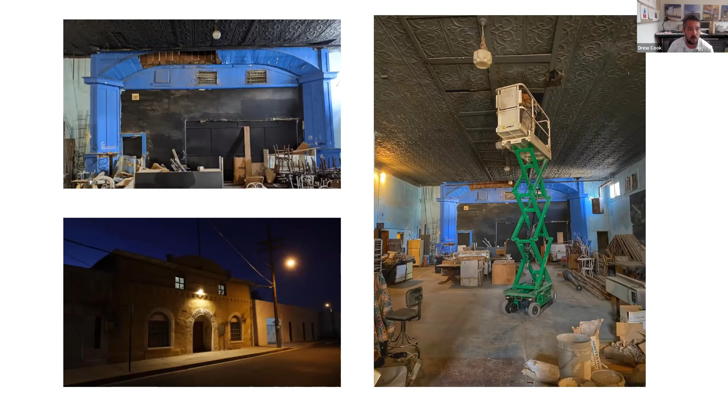Yes, okay perfect. All right, these are a few photos from inside the historic Teatro Carmen when it was originally purchased from the Rawlings family. As you can see, they used it as a storage facility for most of their construction materials and the various properties they own. You can see this is the original stage in the back, the blue, and the proscenium, which we intend to restore.

We started this project off by collecting as many images as possible to tell the story of what was going on along the street, because there is limited information from roughly 1960 to now. It was a real challenge to figure out what was going on.

Luckily, we were able to find the original photo, as you can see in the bottom left. We found that at the Arizona Historical Society, and we're guessing it's a 1918 photo of the original Teatro, where the Elks did not exist yet, built in between two existing buildings, borrowing the adobe walls on both sides. We then used a series of Sanborn maps to lay out what had happened and how the street was built, and the street facade.

You can't see it here, but they had the two theaters along Meyer confused. They originally labeled the Carmen as the Royale and the Royale as the Carmen, which later was adjusted.

Here's a 1924 photo, the third photo on the top line, that shows the theater with the original fly loft, and you can see the shadow bearing down. So we knew that it had a fly loft and a large stage, which was taken away quickly.

A 1941 photo shows that the fly loft has been taken away, but you can see the backside, the oblique here of the corner market, which was the Lee Market, and the fruit stands and markets in between. Some of the Sanborn maps identify that there might have been a bread oven back here. We're not really too clear.

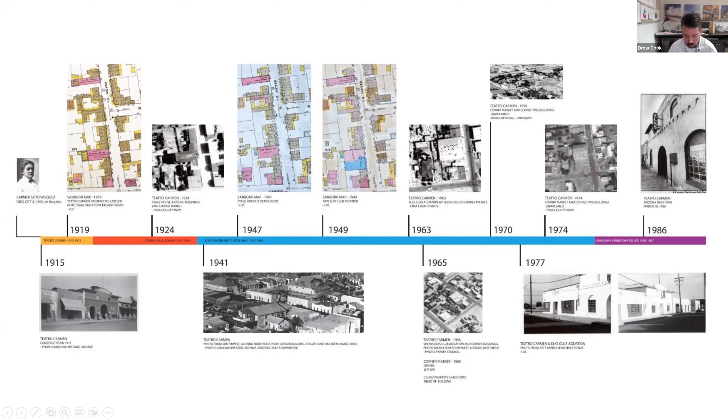These two bottom photos, 1977 photos, are from the historic archive - I'm forgetting the word here - but these are the only two photos we have of the Teatro and the Elks Club aside from our 1915 or 1918 photo.

Here are some of the Sanborn maps that we use to align with our street facade and tell the story of what was going on. You can see through the different maps, in 1947 the Elks had appeared. We found some newspaper articles that identify that the Elks took over the building in 1935, but it's still unclear. You see in the 1949 photo or map that the Elks had added on their adjacent building and identified it as the whole two buildings of them.

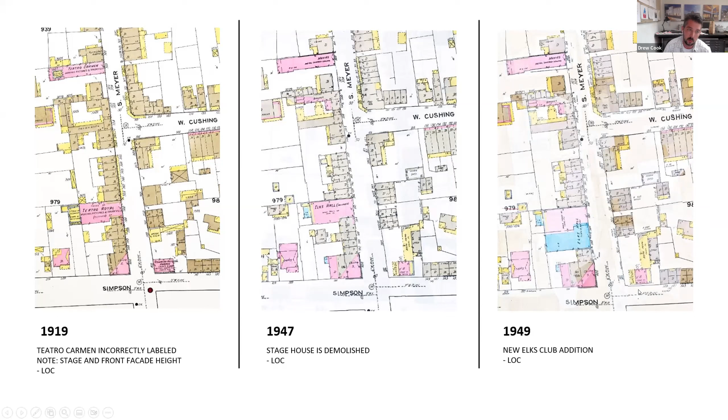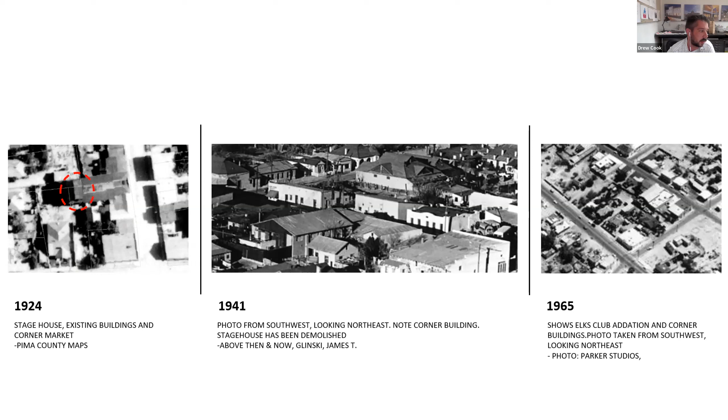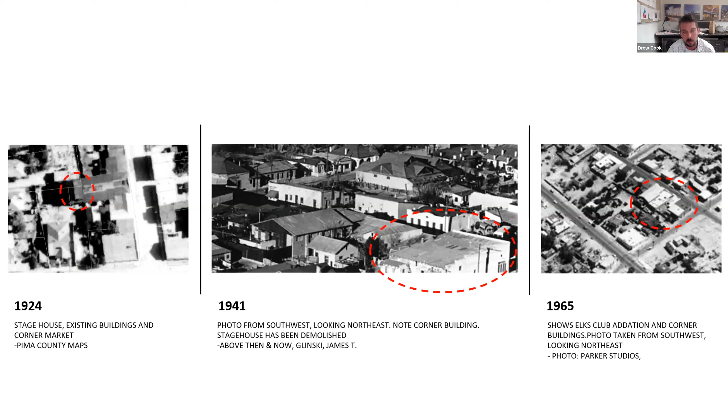Here's a series of aerial photos that helps us tell the story, which I have already gone over, but here's the stage house, as you can see, appearing in 1924. Here is the old market at the corner of Meyer and Simpson in our 1941 oblique. And then here it's still existing, but the Elks Lodge is built in, we guess, 1947, 65 in that existing photo.

Here we have some of the original facade photos, and this is our 1918 photo that we found at the Arizona Historical Society. As you can see, the building was originally a brick building with large openings for the front porch, so you could actually enter in, and it was a covered patio, which is our ideal goal to return the building.

Here's our 1977 photos taken from the historic maps, and it shows that the Elks inhabited both buildings. There's a blade sign with the Elks on the front. You can see that the exposed brick was still there, which is something we intend to return.

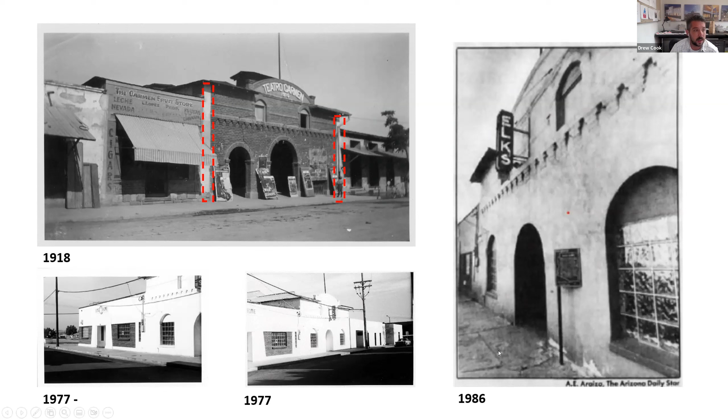Then here's a 1986 photo from the Arizona Daily Star. This outlines the two borrowed walls. Now, the wall that is on the south side is still existing - it's a high adobe wall, goes about 20 feet high. But the one on the north side has since failed and was replaced in two series of construction with CMU block, and you can see that in our most recent photo of it.

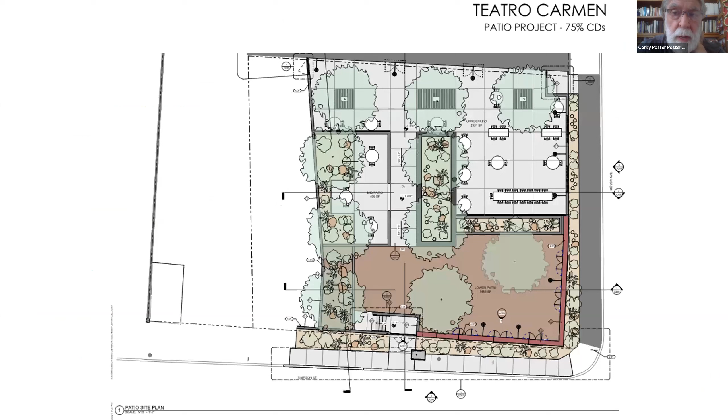We've got a 75% set of drawings that show that. This shows very clearly the upper patio and the lower patio, with the upper being urban, opening directly from the original Black Elks Club building. The area on the left will be part of the last phase of the project, so it's shown in white. Interestingly, that historically has never been built on and is currently a driveway as well.

So an upper patio with trees and tree grates, a ramp down the middle. There's a stone planter dead center in the site that we're going to be using the excavated stone from the basement of Lee's Grocery, which is in the southeast corner of the site. Entry on both Simpson and on Meyer.

Principally the restaurant patio entry will be on Meyer, and the more public patio will be on Simpson. Pima County and Stratford Artworks had this really good idea that we should open the patio much sooner and get people used to using this wonderful space even before we have the rehabilitation of the Elks Club and the Teatro Carmen.

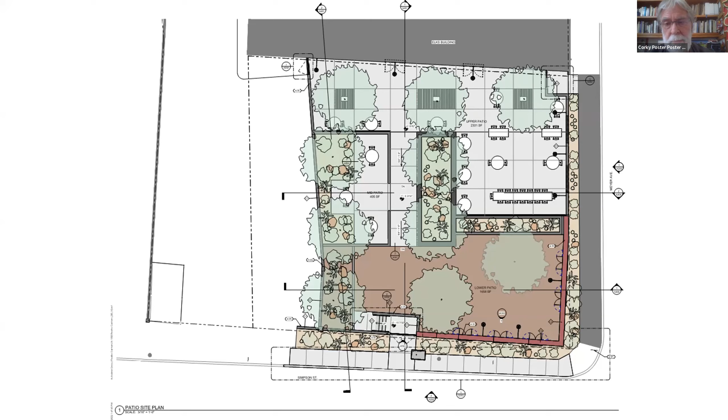This is an older rendering of the patio site. It's accurate in the patio itself. It's not accurate on the walls in the southeast corner and the south edge, and I'll get to that in a minute. On really good advice from the Tucson Preservation Foundation and others, we've raised those walls to mimic the Lee Market that was on the corner, but we'll get to that in some detail.

This gives you the sense of the way the planters divide the site, stepping down from the finished floor level of the restaurant and then ultimately down to Simpson. There are three steps that go down from the lower patio down to Simpson. So most of the patio space is raised. Next.

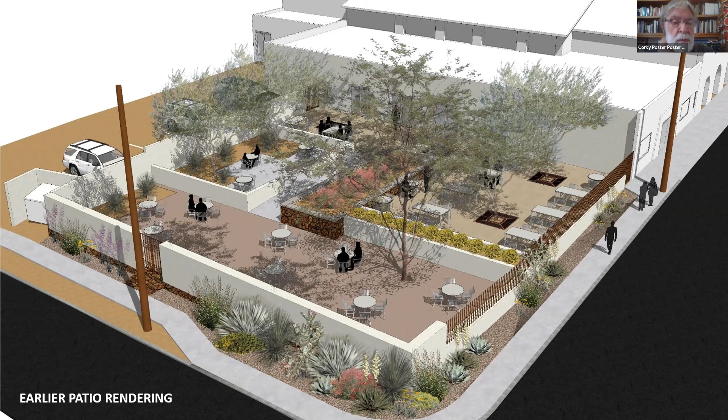This shows a revised image of that patio. You can see that while we kept the lower, more accessible elevation in the middle of Meyer, as you go south to Simpson, we've recreated the mass and volume of that corner grocery store, but only as a patio wall with shuttered openings that connect from the outside to the inside. You'll see a little bit more about that in a minute.

So this is the Meyer Avenue elevation, the full elevation on the east side, showing the restored brick Teatro Carmen, the restored Elks Club elevation that we have excellent original drawings of the doors and windows.

And then the new construction of the patio, which is enlarged above, showing some see-through gratings as you walk south, and safe security protected openings with shutters that open in.

We're going to use some of the stone to create a stone base on the south side, that is the left side of this drawing, and around the corner.

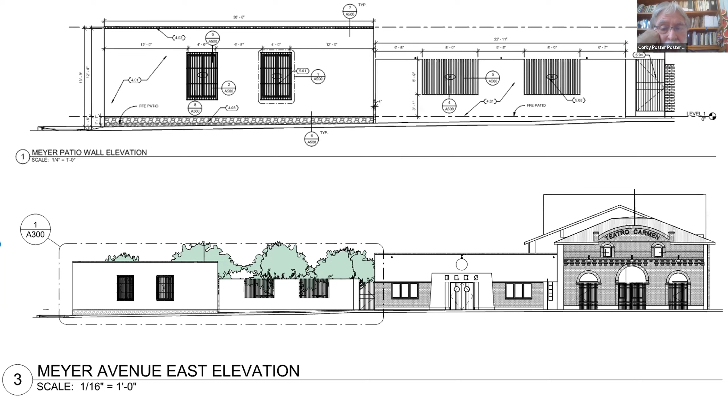This is now around the corner. You can see in that inset photograph from the oblique aerial that Drew showed earlier that it had a step down along that south elevation, which we are mimicking as well.

We had a really good suggestion from Philip Naher at our Barrio Viejo meeting, where he thought, and I agree, that the third window marked with a red X above should also have a red X below. We're going to remove that because, as he pointed out, there's not enough room from the top of that lintel to the roof to have actually had a roof structure, so we think that's a good addition and suggestion.

So this shows the detail of that. Again, those are security protected shutters that open up to the inside, so the restaurateur or the controller of the patio will have the option of opening or closing those.

And then as we go further south, just off to the left of this will be our trash collection and entry into the parking area. Not yet elevated, not yet drawn. That will be a later phase, and we will bring that back to you.

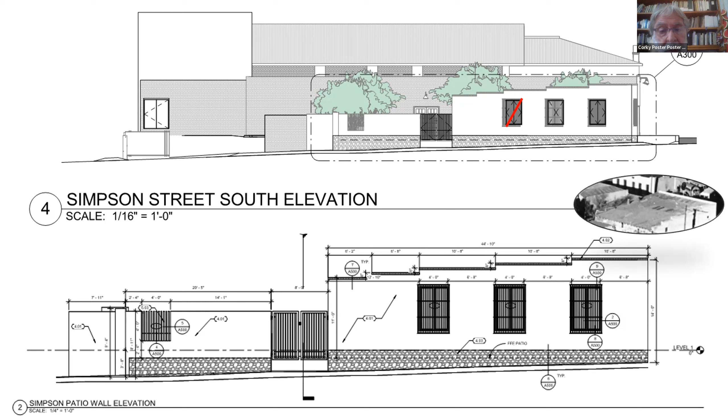Here are some sections. This is on the top, we've got an east-west section looking back toward the Elks Club, showing the new door openings back into the restaurant, low walls and planters in the middle, and giving an idea of the height of that patio wall on the right side of that drawing.

And then this is looking back to the south. Again, the planters in the middle, the patio wall, the lower patio wall to the left, and then the taller wall and the step down of that south wall.

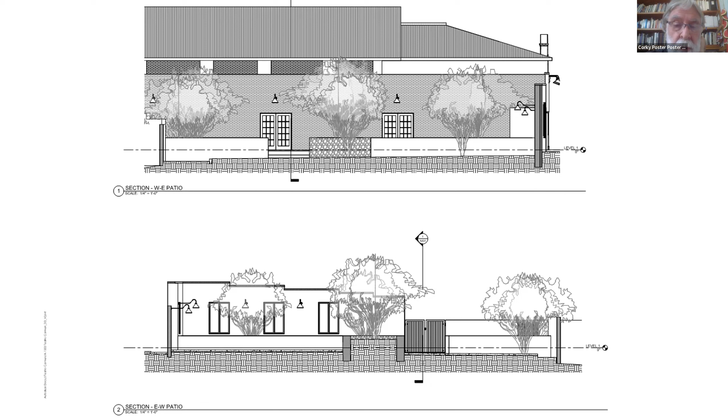Again, following Philip's suggestion, that third shuttered window on the right will be removed. And those gates then will go out to Simpson.

This is one more section looking east on the top. So it's a north-south cut looking back toward Meyer, showing the height of the patio wall, showing the step down foreshortened in the wall along the south edge, and showing that stone planter that will be in the middle of the patio.

We're using lights that were actually shown on the original Elks Club, and it's consistent with a lot of the more recent lighting in Barrio Viejo. Those are all dark sky compliant.

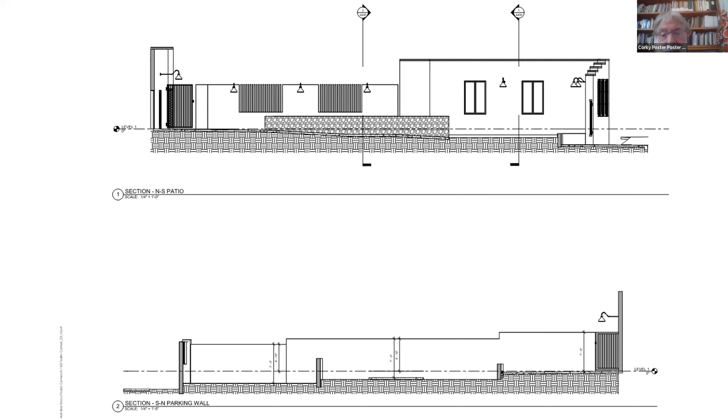And then finally, a last image looking west, and behind that white wall, screened from the patio, would be the employee parking lot. Again, showing interior and exterior lights.

These show the openings. We've got some tricky security issues with panic hardware required to get out of the patio, and therefore some tricky ways that we have to protect the ability to kind of reach around and open the panic hardware from the outside.

So we have the shutters shown on the left, top and bottom. We've got the doors, which will, this is generic. The heights of those doors will be at various heights, and those heights are shown on the right side.

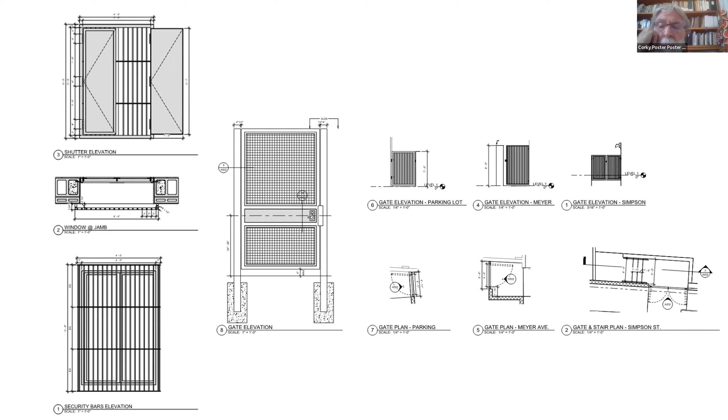Bottom right shows the entry from Simpson. We'll have the gates right at the wall so that we don't have folks sleeping in that alcove, but it'll show a few steps that get you up to the lower patio, which is then higher than the street.

Okay, let's go back. Drew, can we go back to that first axon that we have of the patio, while we have the conversation? I think that shows the most information.

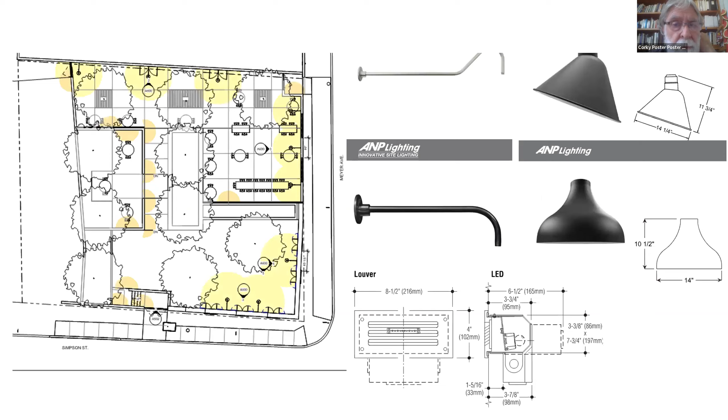Yeah, let's just hold that. And we're happy to hear any comments from the Plans Review Subcommittee.

Thank you very much. Does anybody have comments? Just had a question, you maybe will address this later. Is the archaeology going to be done with the Lee's Market area? Is that where you're doing archaeological work?

I'm going to let Scott, if you're willing to answer that question. Scott is an archaeologist, and I'm about to screw up some of the terminology, and he won't. Are you there, Scott?

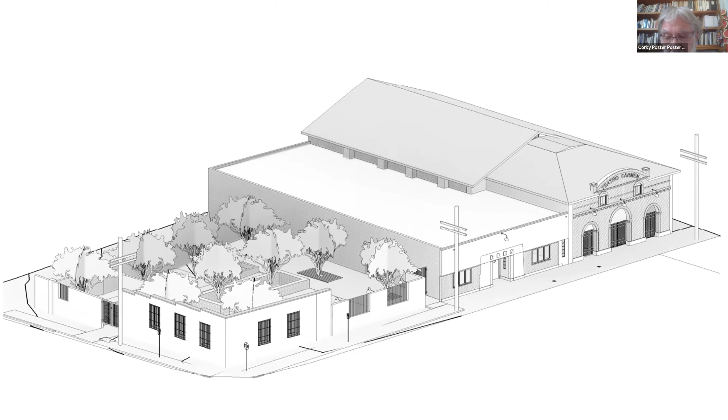I'm here. Sorry, I had to jump on a call. Scott, are you there? Oh, go ahead. I am now.

The patio has been tested archaeologically based on an early version of the footing plans, where ground disturbance was going to take place. The basement of the Chinese grocery was the most significant discovery—stone walls going down at least 5 or 6 feet with a dirt floor. It was filled in probably when it was demolished in the 60s, maybe 70s. We have a sample of the fill from the basement, and there are artifacts from the 60s that came out of it.

We don't plan to completely mitigate or excavate the entire basement. We'll only monitor the excavation for the footings as they go in. There are some other features on the west side of the patio area, where the footer of the west wall will go—pits with a lot of artifacts, probably associated with some of the businesses that were along Meyer Avenue.

Those have been excavated to the degree they could be in testing. The whole area will also be monitored as ground disturbance for footings and so on takes place. The Chinese grocery on the corner really is just the basement filled with demolition and other debris. We haven't found any features outside of that yet, but that will be the source of the stone that Corky was talking about for the connector in the patio.

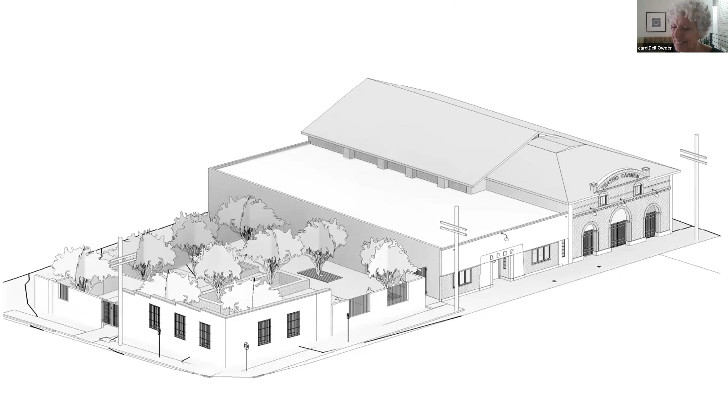We will discuss that in the next phase. We've got a lot to talk about with that. Okay, I'll shut up and let you move on. Thank you—that's in the second half, the second agenda item.

Ricky or Joel, do you have any comments or questions? Yes, this is Joel.

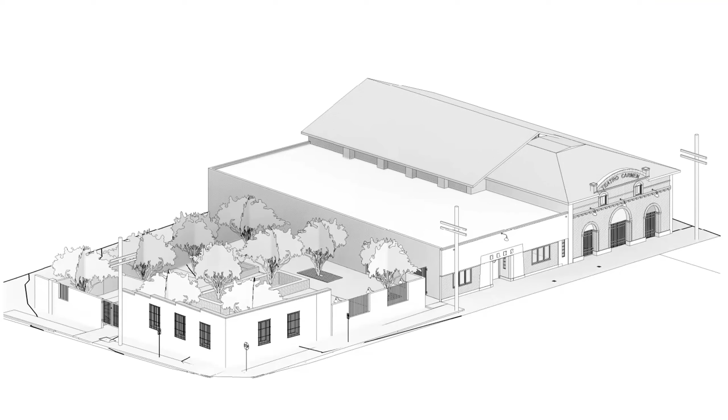I noted in one of the first photographs you showed, there was a restroom core highlighted—what was it, blue? Drew, can you go back to that? Keep going. Oh yeah, teal, more teal I think.

Can I ask how that relates to the original placement of restrooms? Did we have restrooms, or was it an outhouse situation, or what?

So only the pink, orange, and tan were the original teatro. The Elks Club was built with bathrooms, kitchens, bar, and everything else. One challenge—and I'll mention a comment again from Philip Nair—is that we needed to provide bathrooms for both men and women serving both the teatro and the restaurant. We needed a location adjacent to the teatro lobby that could also be used by the bar and restaurant. So while putting it along the front facade wasn't our first choice, functionally it's the only thing that works.

Philip Nair made a really good suggestion that there be frosted windows along Meyer Avenue, so you get light through for the bathrooms, but no vision into the space. He also suggested ensuring the Kelvin color of the LED lighting in there is warm, something at 2700 or 3000 Kelvin, so it doesn't look like fluorescent lights coming out of a bathroom projecting onto the front elevation.

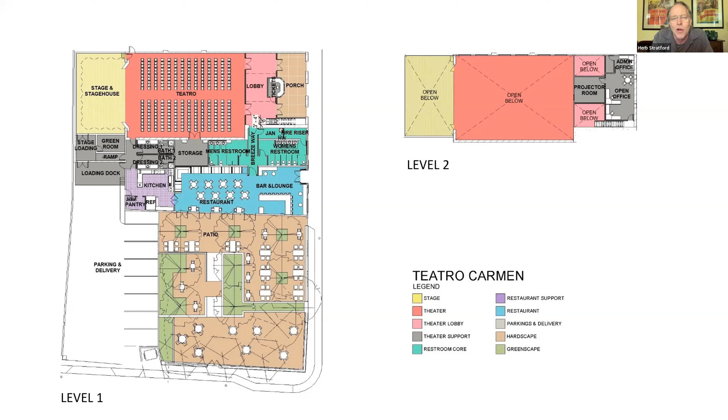I think there's a lot of unknowns at this point, but I definitely hear that, and we want to be a good neighbor. So we want to make sure that we have the space contributing. Right now it's a dirt lot surrounded by a corrugated metal fence.

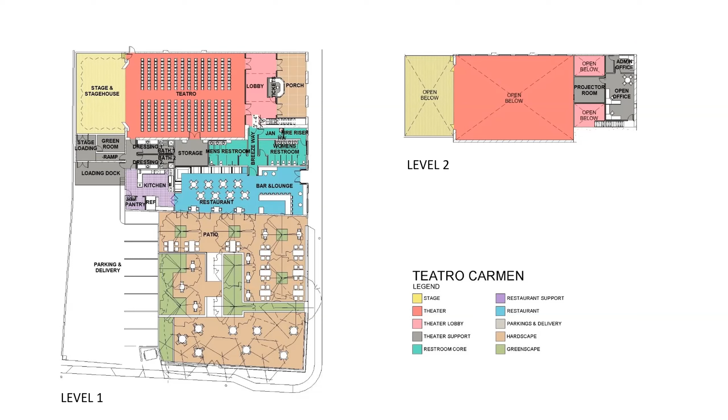So we certainly are trying to do everything we can to improve the streetscape and the accessibility. I really like what you did with that corner at Simpson and Meyer, and the suggestion you followed to mimic the building. I think that's just a really nice effect. Thank you. I don't think I have anything else. If you guys have anything else to add, or we can move on to the facade.

So we're going to talk a little bit about the facade project, which chronologically is the next project we're doing. The county, once we have the drawings done, which will be soon, will provide those drawings to their on-call historic general contractors, job order contracts. That work will commence within the next month and won't take all that long to do. So that will be a kind of a finished product. I know the county and Herb have been very anxious to show some real progress to folks on the street, and so the facade will go a long way to doing that next.

So we've got some pretty amazing photographs. If you look at the historic facade, 1915, 1918, the posters out there talk about the war, World War I. So we know it's pretty much within that era. The middle one is exactly how it is right now. And then on the bottom, you'll see obviously much more detail about this, is what we intend to develop.

We'll talk about the facade and the mural in some detail in a bit. Also, you can see that the facade is peeling, so we have a good chance to see what the quality of the brick is underneath there. As you might guess, there's some water damage to the first 2 feet. There are 2 layers of stucco. The outer layer comes off with your fingers. The original stucco has a pretty good adherence to the brick, so it's going to take some hand scraping. The photograph on the bottom right is the intersection of the brick wall with the adobe wall at that very southeast corner of the teatro.

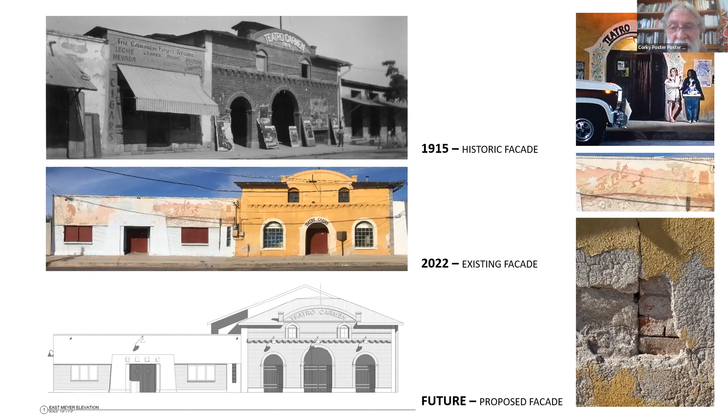So with that great photograph and the construction drawings that we have from the Black Elks Club by Blanton and Cole, the architects of that, we intend to restore that brick facade, restoring the openings of the 3 arches to allow a covered porch inside. The corbelling will be restored, and some pretty modest lighting will restore all of that.

You can see on the Elks that we had a really cool, what I would call Art Deco handmade doors, and we have the ability to recreate those doors. The brick will restore back to a natural brick, and the stucco will be refinished and repainted, and the mural will disappear - I'll explain why we're comfortable doing that. You can also see on this elevation we'll do a little plaster cap on that adobe wall, the tall wall on the left of the Teatro Carmen, and then the concrete block wall on the right side, which has replaced the adobe wall that collapsed sometime in the 70s.

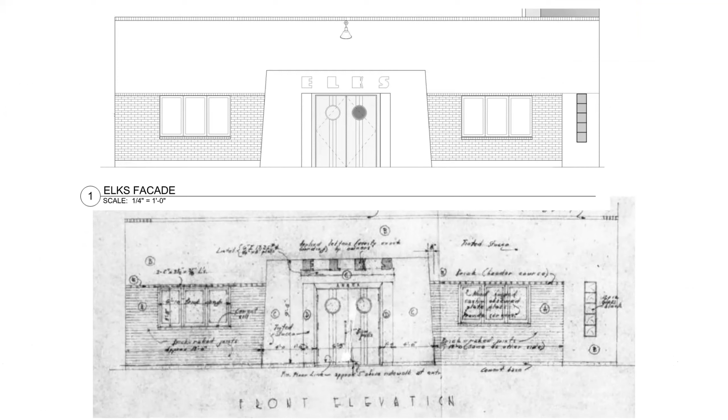Let's look now at the drawings. Nothing makes architects happier than finding historic drawings that allow us to redo this with some integrity and some real accurate information. We're not yet sure how we feel about the chubby letters over the door that say Elks, but we'll see what happens with that. You can see that we will restore that facade to exactly the way it was when it was drawn in the late 40s.

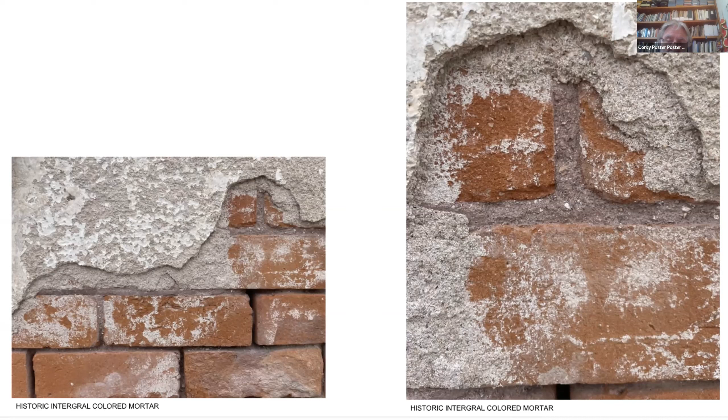And we're real comfortable with our ability to restore that brick facade, and look forward to doing it. As I say, that'll be the next project out of the chute. Drew, can you go back to the hand-drawn elevation? One more.

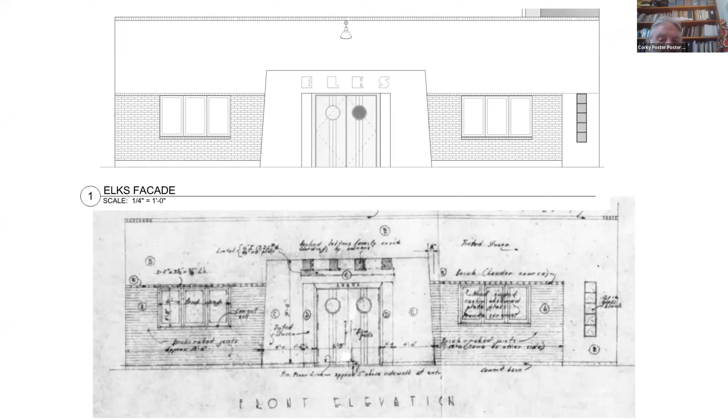Yeah, that one. Okay, any comments or questions? Oh, I have a question.

So, that original drawing from the Elks Club side that showed the chubby letters for the Elks, do you have any pictures of that? Because the other pictures that you had shown— No, we do not have that. We don't even know if they did it. We know it's in the drawings, but it could well be they didn't like it and never put it up. But we have no images that show that sign.

And does the door have a window in it, those circles? Yes. Okay.

And I'm gonna come back to my other question. Somebody else can go first.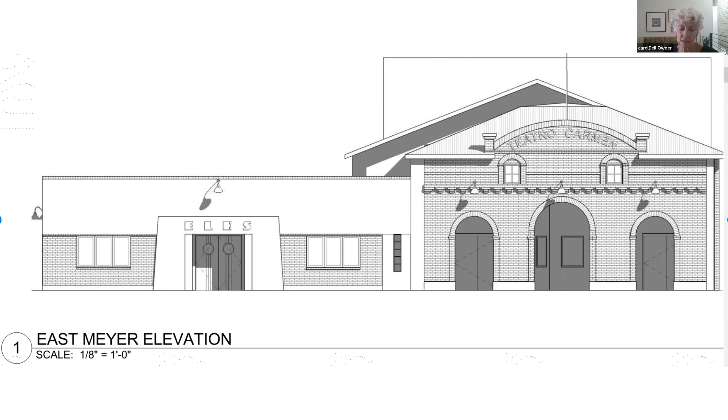Anyone else? Joel, Carol? I just wanted to say what a wonderful job you've done. You've put a lot of thought and effort into this, and I just think it's really great. I was going to ask about signage as well, but you've sort of addressed that, so that matters a lot. Thank you.

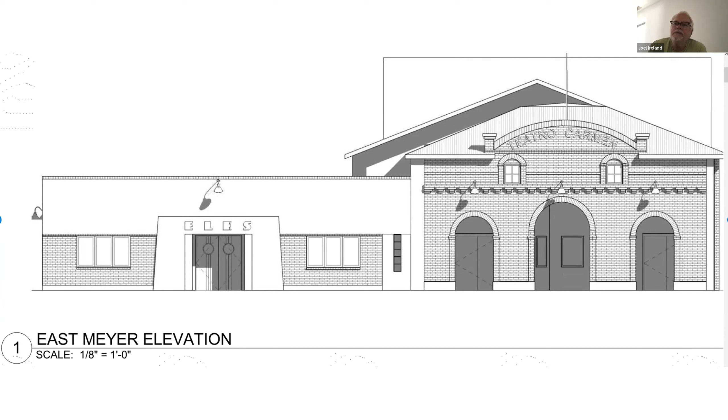This is Joel. I've got a couple of questions if you don't mind. I'm sorry. Just one second, I'm sorry.

Corky, could you? I was wondering about the bar gates that you showed us there. If you can go back to that section.

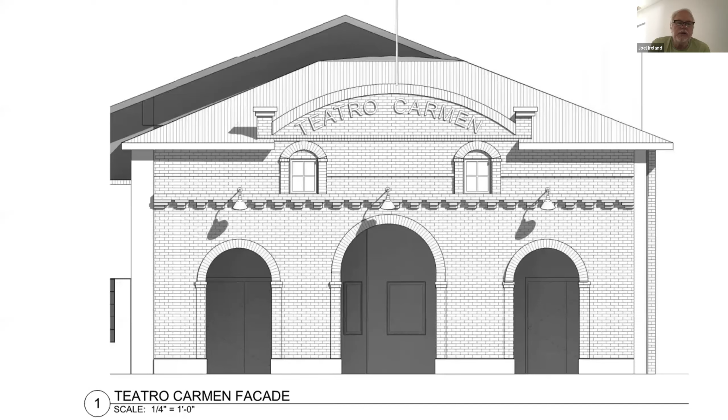Did you hear me? Are you there? Yeah, is that what you mean? I'm sorry, I'm trying to get my picture up. I had my phone ring through my computer. Just one second. Yeah. Yes, that's the picture I meant.

Okay, we know we have concrete bases to the arches, and we also know we have a little kind of pilaster capital at the top. But that's the only image and the only knowledge we have of those gates, and we're feeling like that certainly tells us there's a strong vertical to that gate, and that's the best we have. So that's the best. I have to say that it looks a little, the top of those gates as they are in the drawing seem a little stark to me. I would have thought there would be more of a flare in 1915, or maybe an arch on them, or...

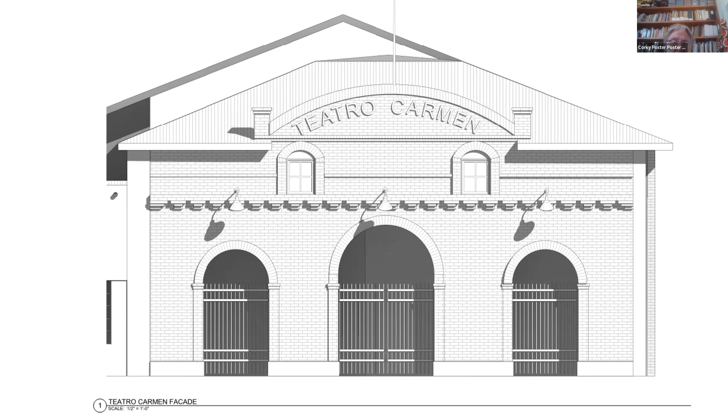Okay, and then you were talking, I don't know, somehow I lost track. You were talking about a new wall with a plywood finish somewhere. Could you go over that section again? I kind of lost track there. Okay, let me, so yeah.

We're gonna open up those arches so that everything inside that porch is gonna be open to the air, right? So you need to make some decision as to how to separate indoors from outdoors. And so we made the choice to build the wall that will eventually be built, not finish it, not plaster it, not do anything fancy, but make that the seal between indoors and outdoors. And that's just not a horizontal problem, that's a vertical problem.

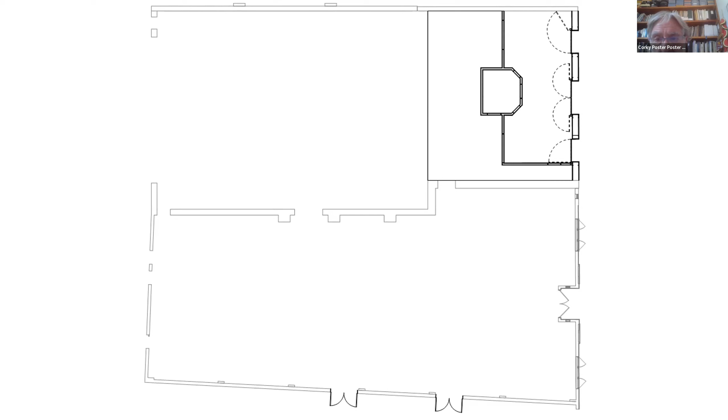And may I jump in here too? Just one of the comments we got with the previous review is we decided not to incorporate the ticket booth. Here we have the ticket booth, but this is just a remnant sort of the schematic design. We haven't really put a lot of in-depth thought in there, so we've chosen just to have a straight wall, two straight walls, and we'll develop that later and add it in. But it made it in this version.

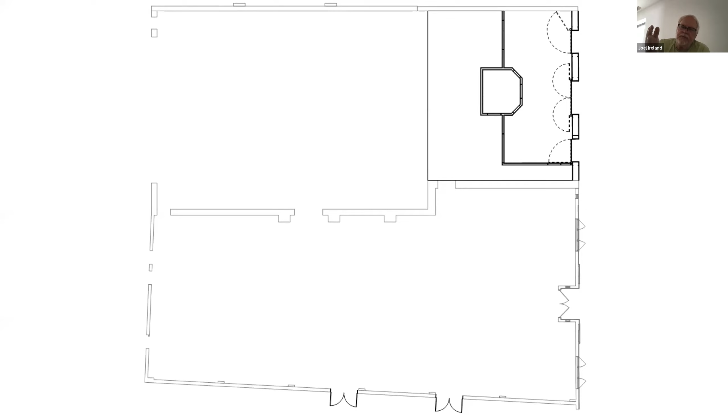I got you. I guess is that a permanent fixture, with the plywood finish? No, that's just temporary. Oh, okay, maybe that's what I missed.

It's just a weather separation at this stage, and we're doing this in multiple stages. So sometimes you have to make a decision as to what's going to separate phase 2 from phase 4. I got you, okay, thank you. That helps my confusion.

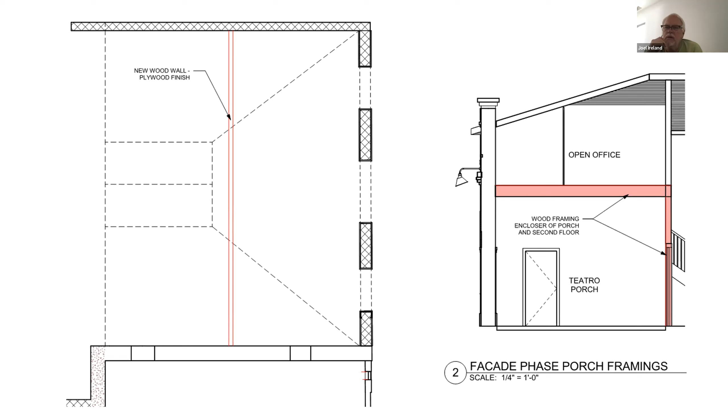We didn't want to do something that we would have to tear out later. So those pink walls and floors are the structure that will be there forever, ultimately. Gotcha, that diminishes my confusion. Thanks.

Thank you, I don't have anything to add except to thank you for taking this on, and Pima County and Stratford Art Works as well for all you're doing. So thanks very much.

I have a question for staff, just clarifying. This is a county-owned facility now. We're doing a courtesy review, but it will not come back through the regular review process, is that correct? That's correct, it's a courtesy review, it's county-owned. The county will not be bringing it back for a formal review, as I understand it. And the permit will run through Pima County, not through the city of Tucson. Right.

Well, we really appreciate you coming in and sharing this with us and giving us the opportunity. So thank you all, and we will be back when we're doing the main theater. Okay, Jan, Ricky has her hand up too.

Ricky: mine was just a comment on Joel's comment about the gates. I was fine with those flat gates, I don't see any need for a flourish. Joel, the building was built by a local carpenter who had built other stuff in the past, but this was like his first major building, so it doesn't surprise me that the gates would have been plain like that. Oh, thank you for that perspective, that's really cool.

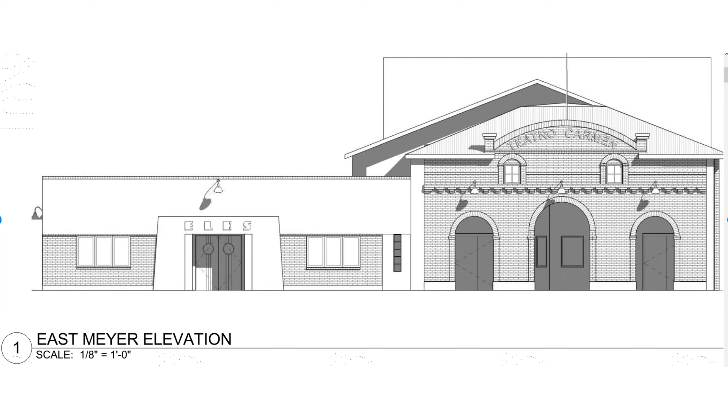Anything else from anybody? Well, thanks again, we're excited to see the work begin. Thank you all, much appreciated.

So Jody, are you going to text Savannah that? Yep, text her, I can now tell her, she's in our office. Okay, thank you, thanks, Drew.

The next one is a courtesy review too, right? The last two? Yeah, correct. I believe so. And the wonders of being on the road, I have to find the agenda. All the reviews today are courtesy. Oh, I realize those were separate items.

Jody, am I allowed to ask a question about the next meeting now, does that interrupt how we run the meetings? No, you can. Is our next meeting on the 8th of August, or next week again? Or September, yeah, oh my God, September, yes. Thank you, September. Oh, and Savannah's back. Okay, so if I can, I'll try and find the agenda again, let's see.

Okay, Savannah McDonald has rejoined us and we're moving on to item 3C. The facade restoration was actually 3B, they were broken out separately, which I missed, I guess. 3C is Tucson Inn sign restoration at 127 West Drachman Street, to restore an existing sign. This is a courtesy review in the Miracle Mile National Register Historic District, and it's a contributing resource reviewed under rehabilitation standards. Staff, do you have anything to introduce this?

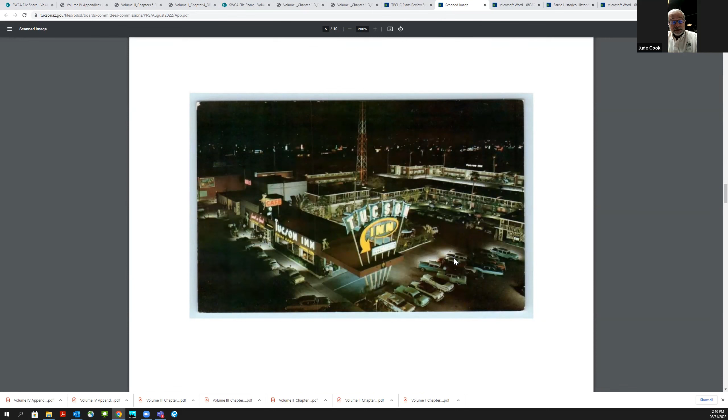So the colors that I've called out are the colors that represent at least what I think is a point in time based on the different colors that have been painted over the years.

As far as the neon colors, what we found by looking at several of the different letters is, up on the Tucson letters, it's actually 6 strokes of neon. The very outside neon, around the perimeter of the letters, is actually a green. The first color of neon on the inside of the letters is blue pumped red, which is pink, and then there's a warm white on the center of that. Down on the Tucson in color, the neon we found closest to it is what's called clear gold 2 now, and that's what we're working with.

And then the light bulbs will be a basic white bulb, and we're just going to retrofit it with the same color combination - basically they'll look yellow at night. They're basically a clear bulb. What I've found is the yellow bulbs, which look great when you put them in, fade out to clear or white within about a year anyway.

What we're doing is pretty much working with the existing fabric of the sign. We're not replacing much - the only thing we're doing is putting new metal in where the old stuff is rotted out. We've got one letter actually off the sign right now because we're finding it's easier to do it down on the ground. That's pretty much what I've got to give you guys.

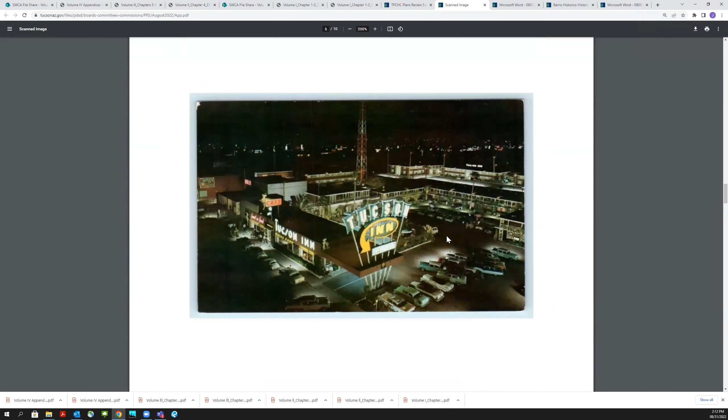Questions for me? I have a question - this is Ricky. Sure. So we have that picture from 1953 where it shows the sign is blue, but is the lowest paint color you found on there that red, and that's why it's being painted red? When I got into it on the one I've got out here in the backyard, I sanded through and found red as a base color.

Are you talking about the Tucson letters at the top? Yes. Okay.

I didn't really run into a lot of blue in that particular part of the sign. The only blues I ran into were down on the area where we've got the word 'in'. Found 2 different colors of blue on that - I found a process blue on the basic shape, and a brilliant blue on the edges of the letters.

Up on the top, and I have mentioned this but haven't encouraged it, what I found on the very base of the shapes of the Tucson letters was black originally. But I think that fell out of favor pretty fast, and I think they came in and repainted it at some point after that. So what I shot for was what seemed like the colors that we're recognizing, but I've seen a variety of different things over the years. The red seems to be somewhat predominant.

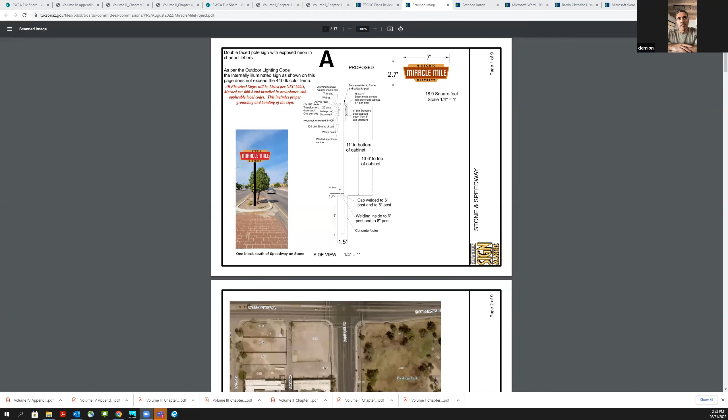The Tucson Historic Preservation Foundation, with preparation of the National Register nomination and ongoing project in the Miracle Mile Historic District, submitted an application for a historic district signage program for Miracle Mile under the Choice Neighborhood Action Planning grant. The city had received an allotment of funding, which we applied for, for this particular action activity to really demonstrate investments into the area that would help with the overarching goals.

One of the primary recommendations out of the Miracle Mile Oracle Area Revitalization Planning process was to create a signage program, and we worked with Community and Housing Development and Rebecca Ruepp's office for many years looking for funding to be able to do this, and we never could until now. So we're really excited to be advancing this project.

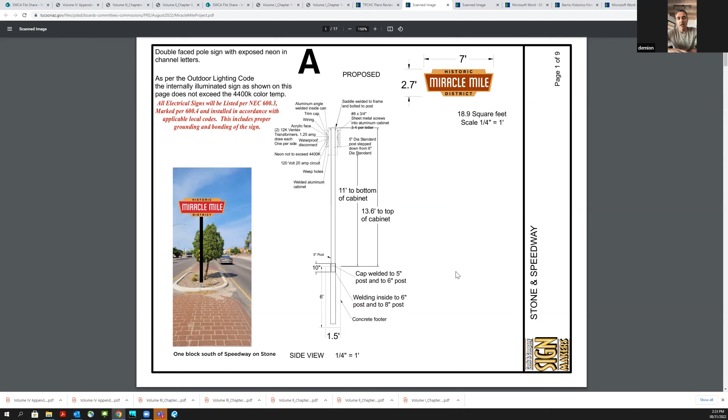The signs themselves were designed and are a derivation of the work that artist Burke Arnold completed for the Gateway Saguaro. If you're familiar with the Gateway Saguaro, it has a chevron on one side that says Miracle Mile and says Tucson on the other, and it's been featured on a host of magazines, newspapers, and TV, really becoming an icon of the city. We're using the chevron that says Miracle Mile, and we're adding historic district.

And the project has four primary components. Component one is we're proposing to install four new neon signs along the corridor that help identify it as the Miracle Mile Historic District. This is the thing you see in other communities like Los Angeles. They're a smaller neon sign, but they would appear in the median or in the public right of way to the side of the road.

We're proposing metal banner signs, which are sort of a metal blade sign that is affixed to the side of the street lights. And then the final is a stop sign topper, which we're more familiar with, which will say Miracle Mile Historic District. So those are the three graphic elements that we plan to include in the project.

And then in addition, we'll have an educational component and a website component. Rebecca Ruepp and the City of Tucson are also creating some mapping tools that will probably roll out with this as well. So we're here to answer any questions. Rebecca, is there anything you want to add?

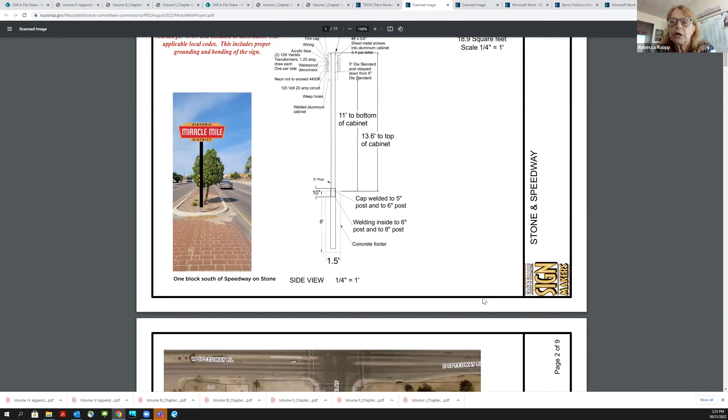No, you might want to say how many banners and stop sign toppers. Yeah, so I think the goal is around 50 banners, but that number will potentially be modified depending on the final costs related to production of the neon signs. And then how many, Rebecca? I mean, I actually don't have the numbers. Yeah, I think it was 30 banners and 50 toppers.

Is that correct, Jude? Is she still with us? It's... yeah, and I'm breaking up big time. Okay, it's 50 of the banners, and I believe we have, I think, 35 locations for the stop sign toppers. Okay, okay, yeah, okay.

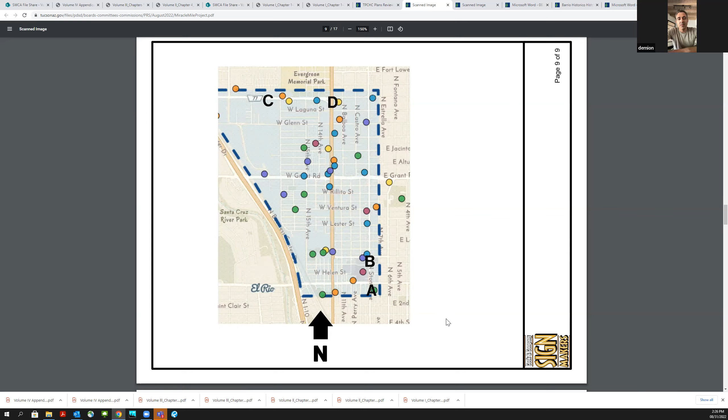So we're here to answer any questions you have. Did I miss it? Were there examples of the blade signs and the stop sign toppers?

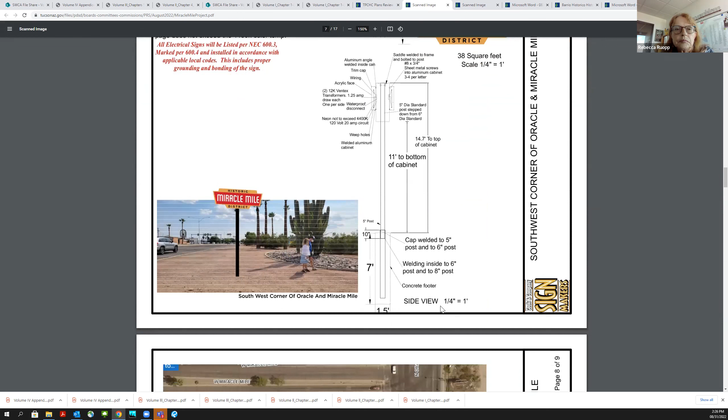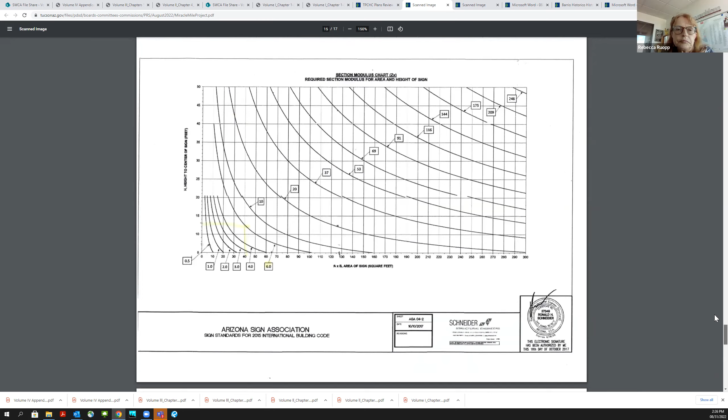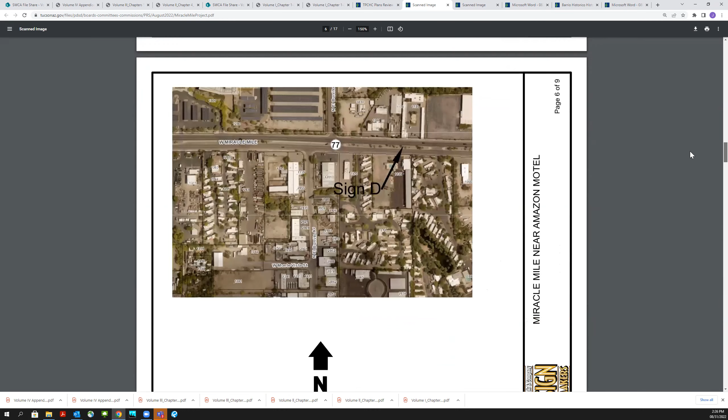Should be in the packet. You guys, Jody, are you able to pull it up? Yeah, go down. Oh, it got passed. It's on page 12, I think, and 16. This is 16.

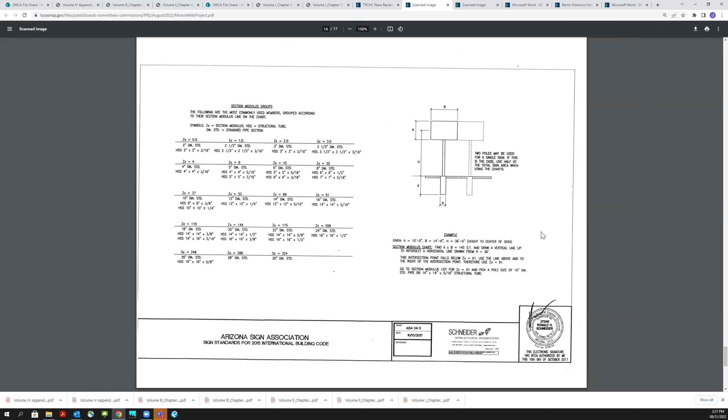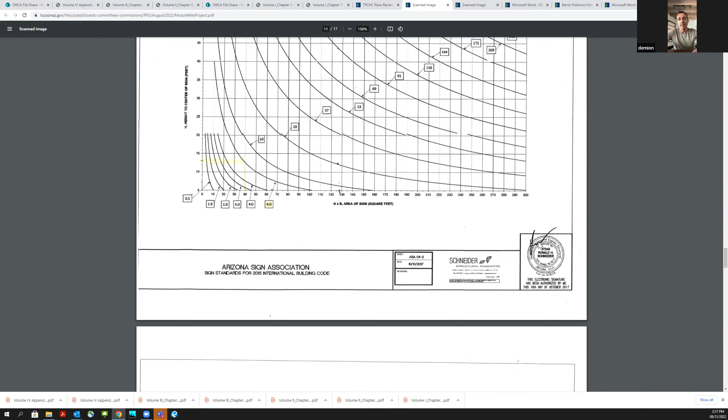Again, the major intention of the program is to really help create some identity and branding around the corridor. The historic district is really distinct and unique in the city. First, it's a commercial corridor. Second, it's actually four separate clusters of resources that are discontiguous, so it's a serial nomination of these four clusters. We really feel this will help people understand, because it's a linear district that traverses four major roads, that they're in the district while they're driving it. It really is primarily an automobile experience, so the signage is critical in helping to connect the resources together.

And what we've seen is we haven't been able to implement this program until now, and there still is a lack of understanding among property owners that they're in a historic district, or what the resources are. The Tiki Motel was recently demolished, which was really a loss to both this historic district and the culture of the city. So we hope this program will enliven and jumpstart rethinking about these resources and how they can be adaptively reused using federal tax credits. The sign topper we're talking about is going to have a similar design to this, right?

The one that's on the screen. Right. And then the banner ones that you were talking about, how will they be oriented? They will be on the street lamp poles, on the street lights. So they'll be larger and higher. When you're driving down the street, you'll see them along the poles, so you know you're in the district, and they'll say Historic Miracle Mile.

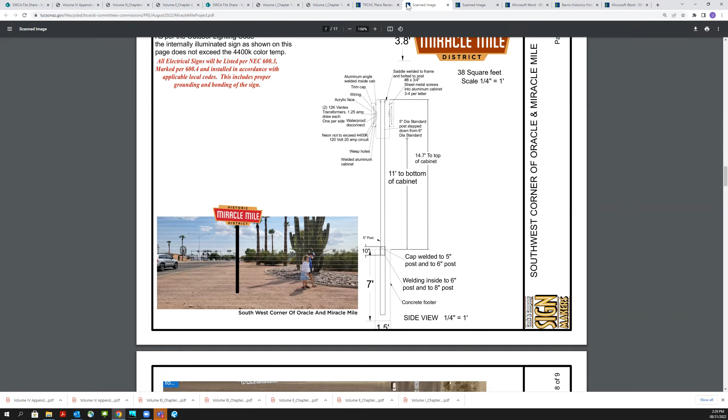Do you guys have a view of those that you can share with us, or aren't they in the materials? I don't think so, I don't see either the toppers or the banners, at least I thought they were, but the banners are not. Rebecca, is that something you can share? I'm looking to see if I can share it. Looking for it. But they are the same shape, that chevron shape, and they're flat. Instead of having three-dimensional neon affixed to the face of them, they are just the painted graphic affixed to the pole.

On page 9 there's that map with all the dots on it. Do those dots represent where you intend to have each of the signs? Yeah, that's the intention. We may have to adjust — when we applied for this funding, we could get a lot for our dollars, but as time has dragged on, it took almost a year just to get through the funding process.

So it's been about two and a half years since we initially put the proposal together, with all the cost escalations we're seeing, so we're having to value-engineer some aspects. Those dots were the original intent, but as we finalize the budget, if we have to cut a few of those signs, we would do it very carefully to make sure the signs were located in the core of the historic district, at the entry points and exit points.

I know you don't have the specific numbers yet, but do you know if you'll have a preference between sign toppers or banners as to which would be removed first? Well, I think we would just decrease the numbers. The sign toppers are the least expensive, the ones atop the stop signs, so we'd maintain those. If we had to cut back, it would be on the larger banner signs — we have 50, so if we had 30, I don't think it would make that significant a visual difference. We'd come up with a thoughtful approach to cutting back the project, but hopefully we won't have to.

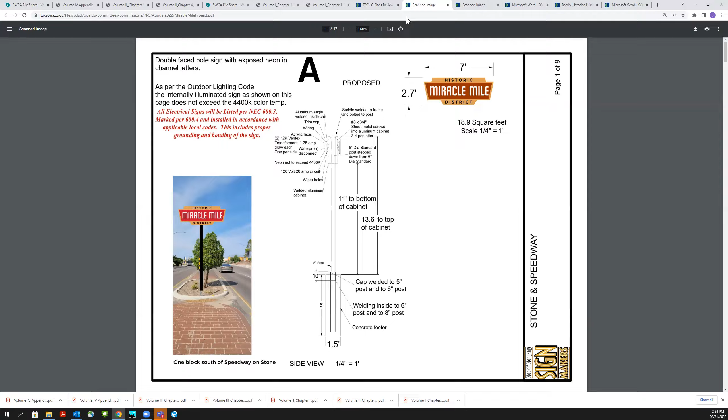Okay, next on the agenda, do we have any updates on the task force on inclusivity? We do not. Terry said she was going to look at combining the responses into the document, but I don't think that's been done yet. We'll wait for an update.

5A, minor reviews. Any updates on minor reviews? Yes, Madam Chair. I do not have any minor review for tomorrow, but I'm working on a minor review on the sign at 224 North Stone Avenue in West University. That is the only minor review I'm working on right now. Others are coming in, but they're not yet ready for review. So I'll be getting in touch with members to get somebody to help us do this review.

Do you need that now, or are you going to check back later, Michael? I will check back later, Madam Chair. Okay, thank you.

5B, any appeal updates? No appeal at this point in time. 5C, zoning violations. I do have one active, a couple of zoning violations that I'm working on.